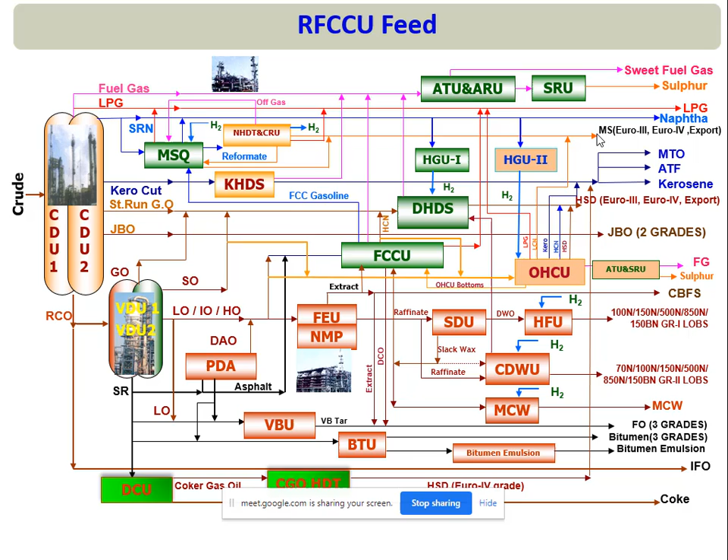So looking at this refinery configuration, the main feedstock of FCC is vacuum gas oil, coming from the vacuum distillation unit, and then the bottom product SR can also be feedstock depending on whether it is FCC or RFCC. If it is RFCC, then SR can also be a feedstock. Apart from this, hydrocracker bottom product, UCO, can also be feedstock. If there is a furfural extraction unit, then extract. Similarly, if there is a propane deasphalting unit, deasphalted oil can be fed, and slack wax can also be fed. So there are several streams which can act as feedstock of the FCC unit.

What we get from the FCC unit are products like dry gas, also called fuel gas, then LPG, and LCN, which is treated in the MSQ, motor spirit quality upgradation unit, to basically make petrol or gasoline. Then there's TCO, which is a combination of heavy cracked naphtha plus LCO. This is usually treated in hydrotreating reactors like DHDS or DHDT. And the bottom product is called DCO, which is again fed into the delayed coker unit.

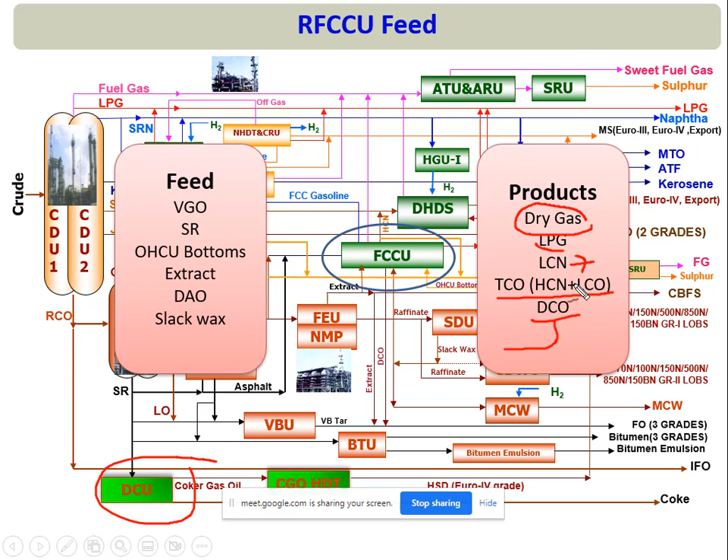So we are getting products like fuel gas, LPG, LCN. Based on that we can make petrol, and based on TCO we can make diesel. So these are the products we are getting. How we are getting it, we will discuss here.

Now about the feedstock or throughput of the FCC unit. Generally 10% of crude throughput is the throughput of the FCC unit. Suppose our crude distillation unit has a capacity of 1000 tons per hour, then FCC feed capacity will be around 100 tons per hour. It depends on the refinery configuration and may vary, but this is a rough estimate.

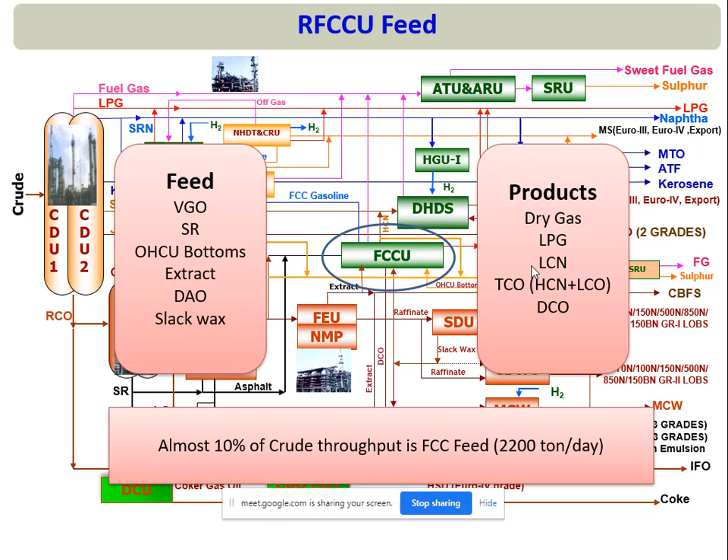Now before I explain how we achieve this, let us understand the importance of the FCC unit. It is one of the most important units in a refinery, and one of the most complicated also. If you learn the FCC unit thoroughly, many people say you can gain around 40% of refinery knowledge just by knowing this unit. It is one of the most critical and complicated units in a refinery, and many say that if you are a chemical engineer with working experience of FCC unit, then you have learned almost every type of equipment and process.

But right now I am explaining why it is very important in refinery. It is called the gasoline machine, since 40 to 60% of a refinery's gasoline production comes from the FCC unit. So petrol, one of our most important products, is mostly made in the FCC unit. And FCC is important because it converts very low value feedstock, like vacuum gas oil or short residue, into very high value products like LPG, petrol, or diesel.

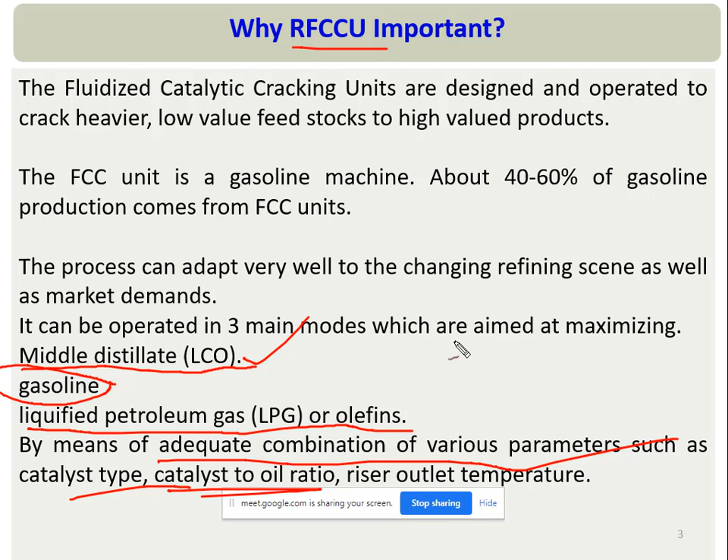So we have several parameters. By changing these parameters like riser outlet temperature, catalyst to oil ratio, catalyst type, we can convert our one product to other depending on our economics.

Let us start our discussion and see what is the full form of this unit. The full form is Fluidized Catalytic Cracking unit. The reaction is catalytic reaction, and what it is doing is cracking very large molecules into lighter molecules, and it is cracking in a fluidized bed reactor. The name itself suggests many things. It's a fluidized catalytic cracking unit, meaning cracking is taking place in the presence of catalyst and in the fluidized bed reactor. So this is a catalytic cracking reaction, so there must be some catalyst.

And what is this catalyst? If you are learning about secondary processes like FCC, hydrocracker, delayed coker unit, and DHDS, DHDT type units, these can be better understood by first understanding what the catalyst is and what type of reaction is taking place. Because if you know the chemistry, you can even predict how the equipment will be. So let us first learn about the catalyst and reaction, what the catalyst is and how it acts, as well as what type of reaction is taking place, and then we'll go into the processes.

FCC catalyst is basically made of four major components. The primary major component is called zeolite, which is the main active ingredient of the catalyst. Apart from zeolite, there is matrix, which also has some important purposes I will discuss. Then there is clay, and all these three will be bound by another component called binder. So with binder, we are basically binding zeolite, active matrix, and clay. These are very porous catalysts with very fine particles, like sand type particles, having very high surface area, with particle size varying from 10 to 150 microns. It's a very small type of particle, looking like white sand.

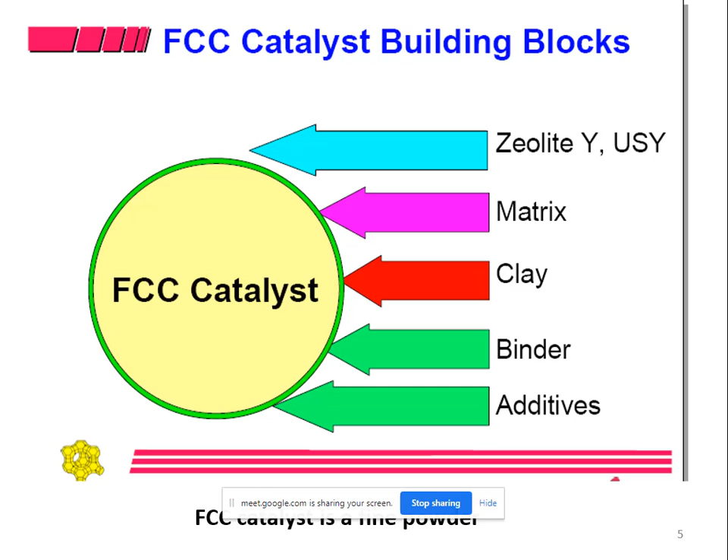What is zeolite? You may have heard about molecular sieve. It's a very important catalyst, and this is a very vast subject. Several books have been written only on this catalyst, so I cannot delve into much detail, but a very basic understanding will be provided in this lecture. What is zeolite? Zeolite is basically crystalline aluminosilicate. Now look at this structure. This is basically a tetrahedra, and at the center of this tetrahedra there is a silicon, and there is another aluminum.

So one aluminum is connected with four oxygens, and generally we know that aluminum remains in +3 oxidation state. So there will be a net negative charge on aluminum, while silicon will be neutralized because it's having +4 oxidation state and connected to four oxygens. So there won't be any positive or negative charge net. However, on aluminum there will be net negative charge, and to neutralize this there is an H plus ion.

If this type of zeolite is neutralized with H plus, this is called HY zeolite catalyst. There could be several other types of zeolite: if it is neutralized with sodium then it is called NaY, and there could be several other ways. If it is neutralized with some rare earth then it is called REY. Now, because of this H plus ion, this zeolite acts as a Bronsted acid.

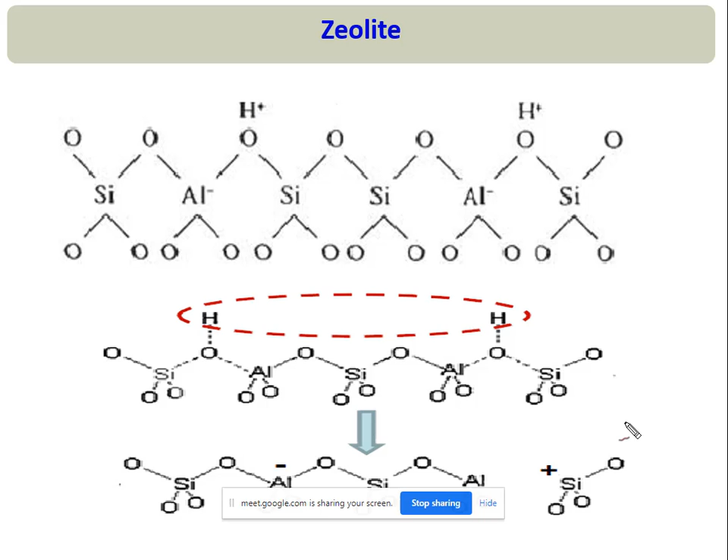Now let me explain how catalytic activity arises with zeolite. This negative charge is neutralized with this H plus ion, and this H plus ion acts as an acid, so this will act as a Bronsted acid. Another thing is, at very high temperature, these two H plus and one oxygen will separate, and because of this separation there will be a plus charge on this silica, and then it will act as a Lewis acid. So this zeolite can act as a Bronsted acid as well as a Lewis acid at very high temperature.

So this is again represented here as zeolite at very high temperature, where H2O can be liberated, and this will become an active Lewis acid site because it will accept electrons. So why am I explaining that this zeolite can act as a Bronsted acid or Lewis acid site? Because this is the reason why this reaction is taking place with this zeolite.

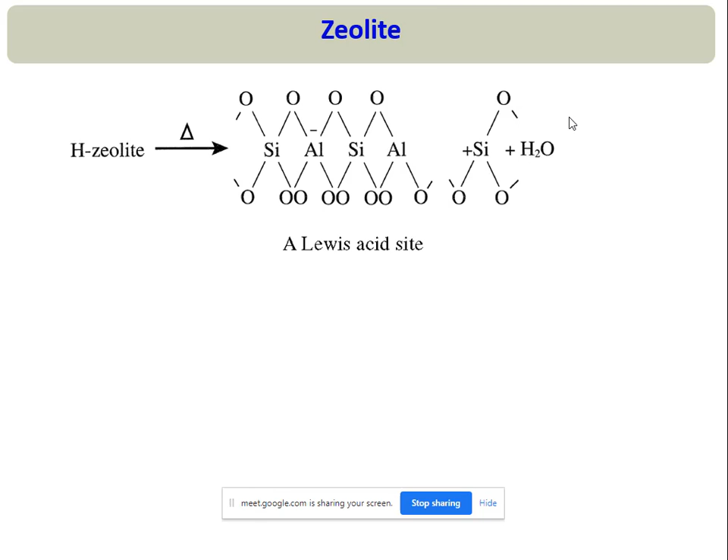Let me explain. This can act as a Bronsted acid site, meaning it can donate protons. And this can act as a Lewis acid site, meaning it can accept electrons. This is very simple chemistry we have learned in school also.

So suppose one olefin is there, and if it is acting as a Bronsted acid site, it will provide an H plus ion, and then this carbocation will form. Similarly, if there is an alkane, and it is acting as a Lewis acid site, then an H minus ion will be accepted by this Lewis acid site, so again a carbocation will form.

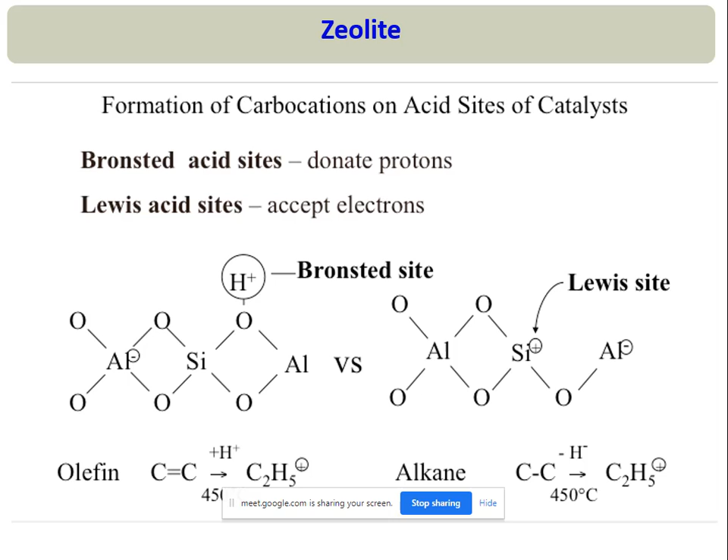So due to this zeolite catalyst, due to this acidity of the zeolite, olefins or alkanes may convert into carbocations, and once a carbocation forms, several different reactions can take place, because we know that tertiary carbocation is very stable. So this carbocation will rearrange and try to form a tertiary carbocation, so isomerization reaction will take place. So in FCC, isomerization reaction takes place.

One reaction we have understood based on these catalytic properties. Another reaction: this bond is called the alpha bond, this second bond is called the beta bond. Now wherever there is a positive charge, the beta bond is usually a very weak bond, so this beta bond can be broken because of this. We have learned this in school in basic chemistry.

So this bond can break, and if it breaks at this side, then this will form an R plus ion, and one olefin will form. And if this beta bond breaks, then what happens? R-CH2 forms, and then an olefin forms. So you see what is happening here: a large long chain molecule is breaking, or basically cracking, into smaller molecules, and olefins are forming.

So you see here, because of this zeolite, two different types of reactions we have explained right now. One is the cracking reaction, where large molecules crack into smaller molecules, and at the same time olefins are forming mainly. As well, due to this carbocation rearrangement, isomerization reaction is also taking place.

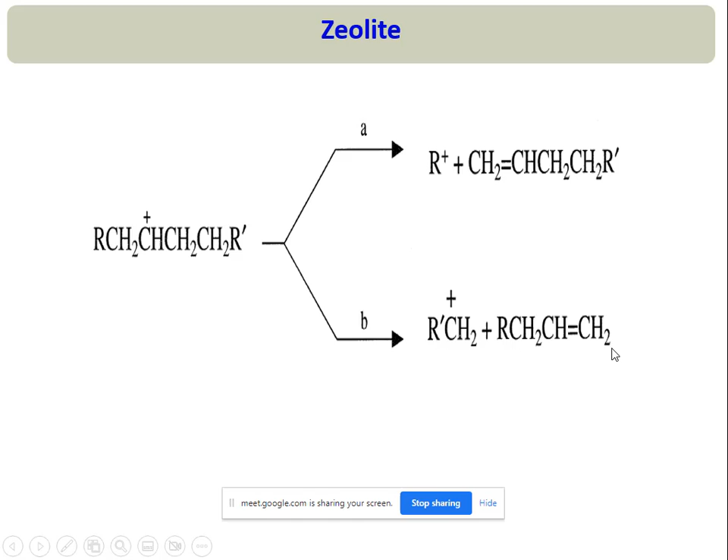I hope up to this point everything is clear, and now let us understand some other type of reaction which might take place in FCC. Because it's a complex series of reactions taking place in FCC, and almost every reaction, the cracking reaction, is basically endothermic, so it is the main reaction. FCC reaction is mainly endothermic.

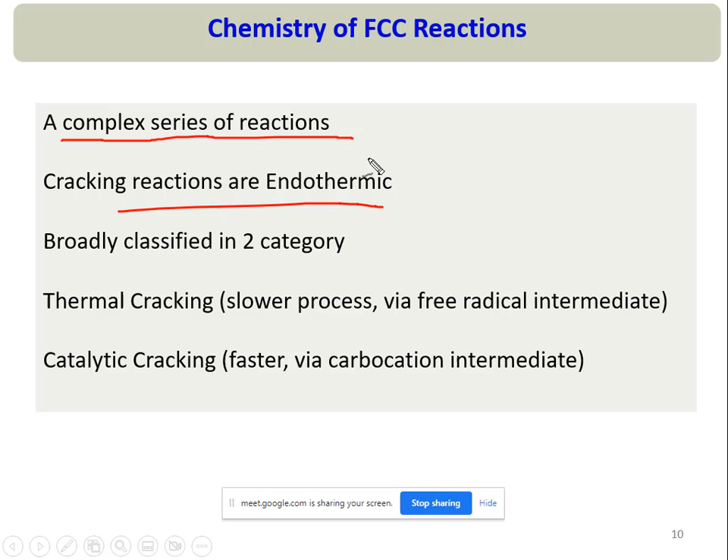So apart from cracking and isomerization, there is another type of reaction that is very important, called hydrogen transfer reaction. And how is hydrogen transfer reaction taking place? Here two olefin molecules, or one olefin and one naphthene...

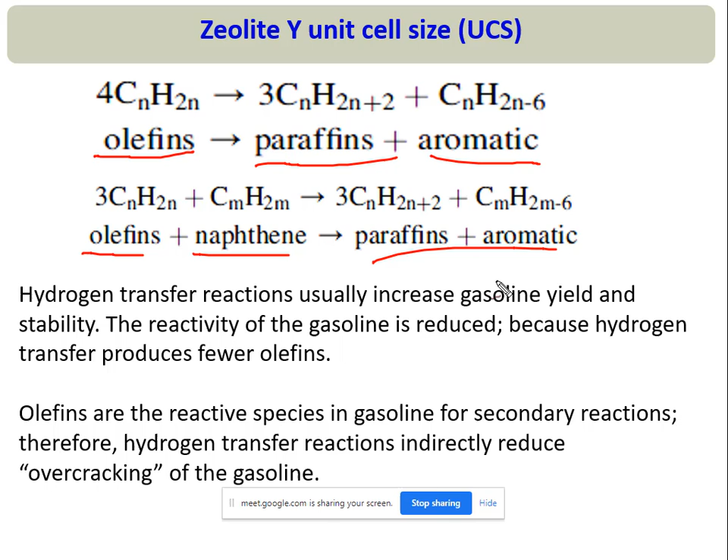So in this reaction, one reactant will be olefin, and another reactant could also be olefin, or it could be naphthenes. These two react and hydrogen transfer takes place, and because of this, one olefin is converted into paraffin and another is converted into aromatic. Similarly, here one is paraffin and another is aromatics. So this is another type of reaction taking place, hydrogen transfer reaction.

Apart from this, there could be dehydrogenation reaction because of metals coming from the feed, which may also promote dehydrogenation. These are some desirable reactions, hydrogen transfer and cracking or isomerization, while dehydrogenation reaction is undesirable. We will talk about this later on.

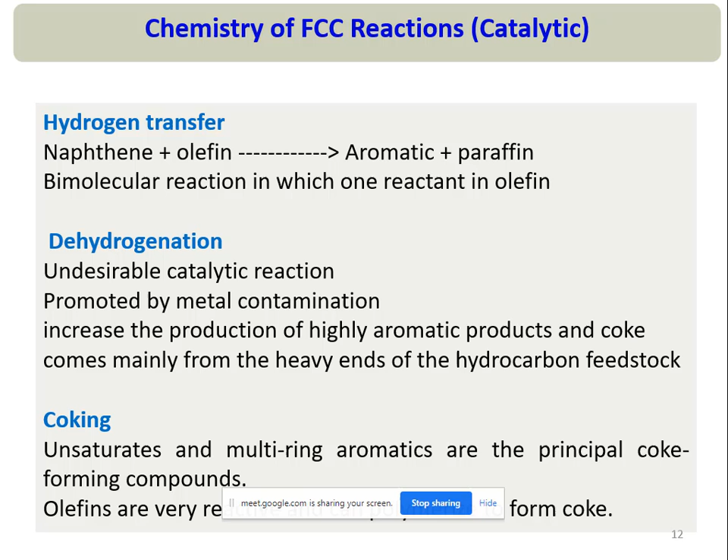Apart from this, there is another reaction called coke formation reaction. What happens is unsaturated olefins or multi-ring aromatics basically polymerize at these conditions and form coke. It's a polymerization and condensation reaction, and it's a complicated mechanism, so we won't delve into that. So basically the reactants for coking are unsaturated olefins or multi-ring aromatics, which may lead to coke formation. So these are the reactions taking place, and I have explained how it happens.

Apart from zeolite, there could be matrix. What is the purpose of this matrix? Basically zeolite has very small pores, and because of that there is selectivity in zeolite, so everything cannot enter the zeolite pore. So how will you convert very large molecules, meaning crack very large molecules, since they cannot enter zeolite? There is another active ingredient in the catalyst called matrix, which basically cracks larger molecules into smaller ones, and then they go into zeolite, where they are selectively cracked into petrol, diesel, or LPG. So basically it enables the FCC catalyst to process heavier feedstock with large hydrocarbon molecules.

Apart from this, there would be a binder, which basically provides physical integrity and mechanical strength to the FCC catalyst. So this is all about the FCC catalyst, and during this discussion I have also discussed the types of reactions taking place in the FCC catalyst.

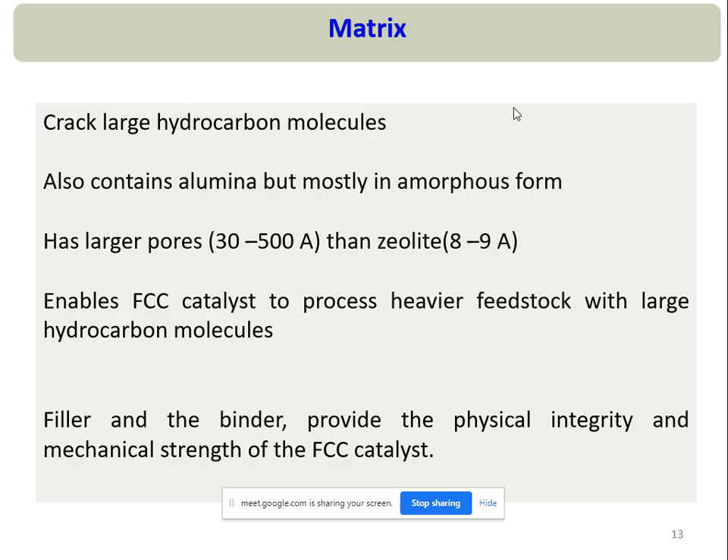Now let us learn about some deactivation mechanisms of catalyst. This is a very general understanding, basic in chemical reaction engineering, and it will also be useful in this FCC discussion. So I have just summarized the deactivation mechanism. There could be several possible ways to deactivate a catalyst, and some are temporary deactivation while others are permanent deactivation.

So one temporary deactivation is coke formation. Coke, as I already explained, also forms during this reaction, and it adsorbs on the active site of zeolite, causing the catalyst to deactivate. So catalyst deactivation results from coke material deposition on the surface of the catalyst. This is basically a temporary deactivation because it's reversible—if you burn the coke, the active site will again be free.

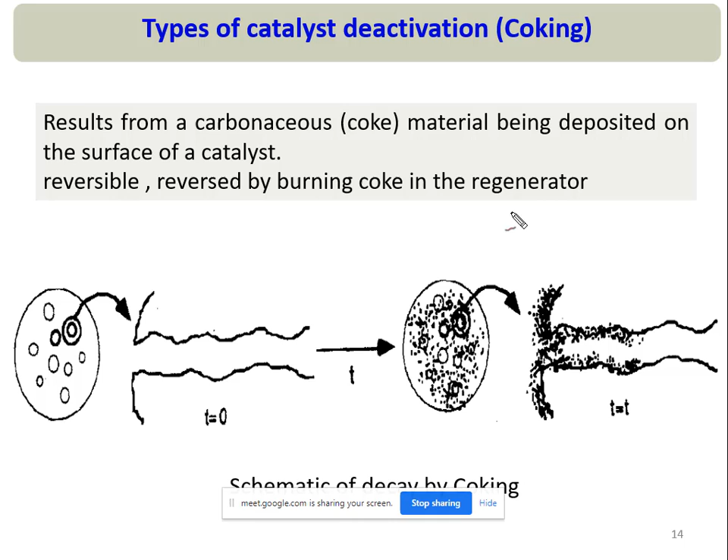Apart from coking, there is another deactivation called sintering or aging. This happens at very high temperature. At very high temperature, the porous structure gets destroyed, and because of this, the reactant cannot enter the pore, and the reaction does not take place. This happens at very high gaseous temperature, and it will permanently deactivate the catalyst.

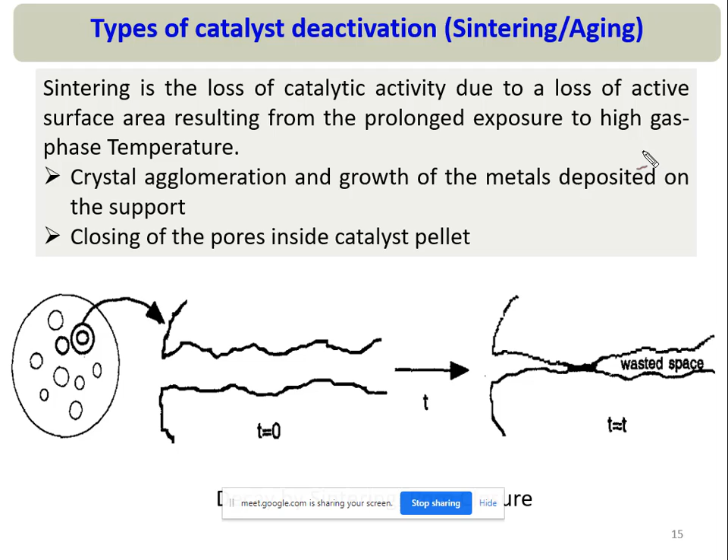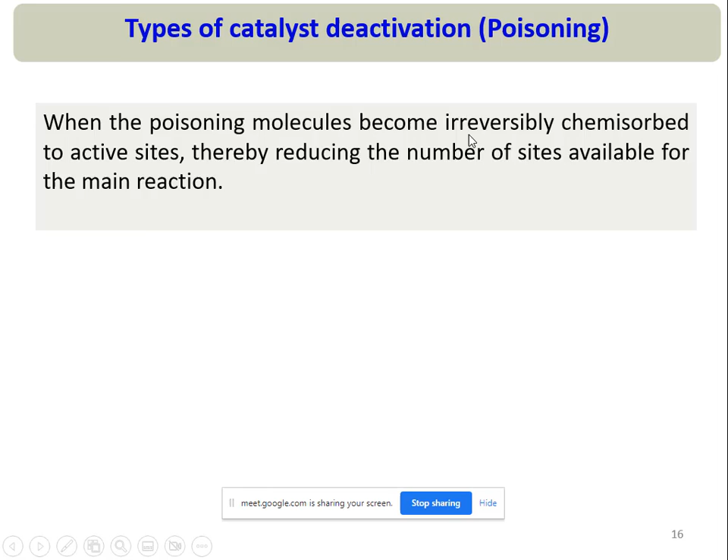Another, third type of deactivation, is called poisoning. Here, some metals adsorb on the catalyst active sites—that is chemisorption, meaning chemical adsorption takes place, and this type of adsorption is irreversible. Once it has been adsorbed on the active site of the catalyst, it won't be available for our main reaction, and in that way the catalyst will deactivate permanently. So all three types of deactivation may take place in FCC, and we will discuss this while discussing the reactions.

Okay, so we have discussed the catalyst, we have discussed the reaction, and we have discussed the catalyst deactivation process. Now we will discuss the process.

Before I go into the process flow diagram, let us first understand what fluidization is, because this reactor is basically a fluidized bed reactor, and if you have gone through fluidization, it will be very easy for you to understand. But anyway, I am explaining briefly what fluidization is here, and then we will delve into the process. See, suppose we have a fixed bed of catalyst here.

Fixed bed of catalyst means catalyst particles are there. Suppose if there is a catalyst particle on this column, and I am providing gas from the bottom. Gas will move through this catalyst particle, and this interparticle space is where gas will flow through these paths. This type of reaction taking place in this type of reactor is called a fixed bed reactor.

Basically, gas is moving through the catalyst, through the intermolecular gap. During this reaction in a fixed bed reactor, the fluid particle moves like this. Now suppose I'm increasing the gas velocity.

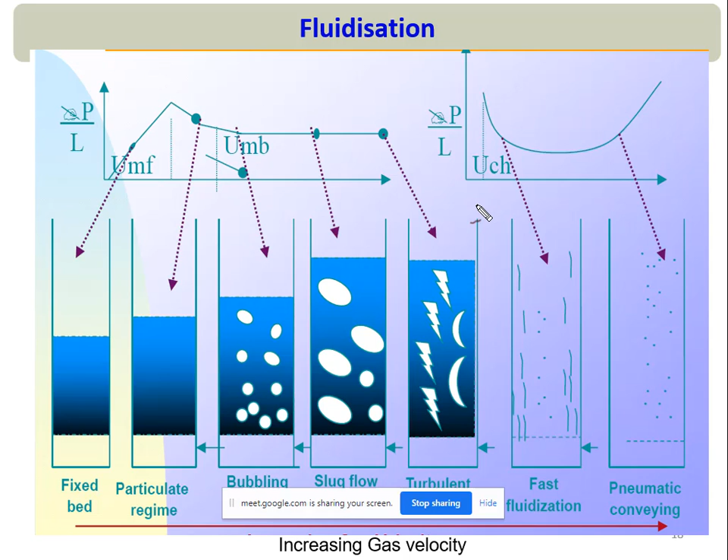These fluidization regimes you will observe in the FCC different sections, I will discuss about it. So here you should understand that because of this gas velocity, I am converting these solid particles into a fluid, and there we will apply every fluid mechanics formula.

As I explained in the last part, any feed which goes into any unit first comes to the surge drum. And I explained that there are several reasons for the surge drum. One is that if our upstream pump disturbs, then also our unit will not get disturbed because of the surge drum, because it provides residence time.

So I will discuss about this. Right now, suppose whatever feed is coming will first come into the surge drum, and from the surge drum there is a feed pump, and it will go through a series of heat exchanger networks. Okay, just one minute.

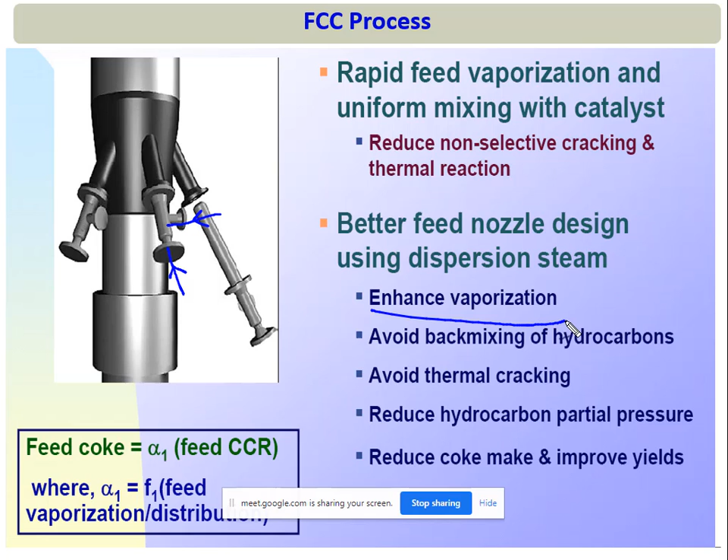Why am I explaining this, why is vaporization required? Because the reaction which will take place in this riser should be done in vapor phase. Why? Because the catalyst particle is a very small particle, it's like sand, and suppose there is sand, and if you provide liquid, then mud will form. There should not be liquid in this whole process.

The feed which is coming in the liquid phase should convert into gas as soon as possible, and for that there is a nozzle that basically breaks the feed into small particles. There, hot regenerated catalyst is coming, and hot regenerated catalyst will be in contact with the feed, and it will vaporize the feed immediately. Then this gas - I mean feed gas and catalyst, hot catalyst - will move into the upward section.

When it moves in the upper section, because this is a pneumatic conveying zone of fluidization, during this movement reaction will take place, and this type of reaction is basically endothermic, as I have explained. So during this movement reaction will take place, and during this reaction our product will form, as well as coke will also form, and coke will deposit on the surfaces of the catalyst. So the catalyst will deactivate, and at the same time product vapor will form.

So once this reaction takes place, our main purpose will be to separate this catalyst, so that I can burn this coke and the catalyst will again be regenerated, become active again. So I have to separate this catalyst from the product vapor, because product vapor is our main aim - that's what we are doing all these processes for.

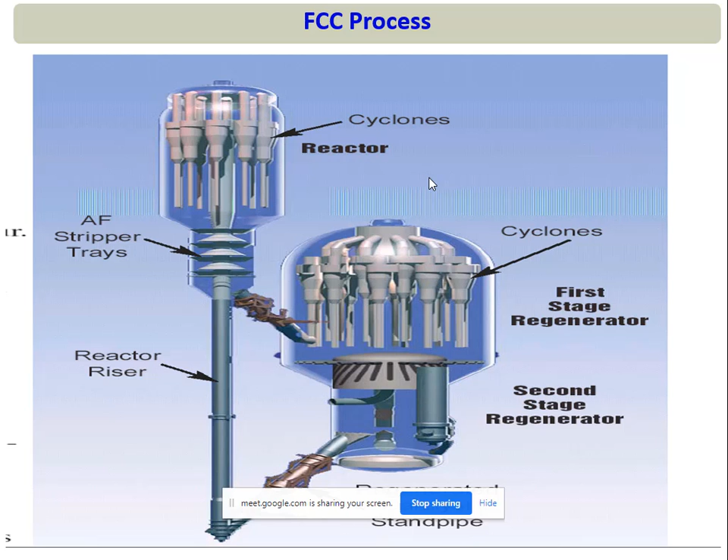Basically what happens in a cyclone separator is the gas will enter tangentially, and due to this entrance, the gas will follow a circular path. During this circular path, catalyst particle, which is heavy and has high density, will move towards the outer periphery, while the gas remains in the center. The gas ultimately moves out from the cyclone from the top, and the catalyst particle, which goes into the outer periphery, ultimately moves in the downward direction and goes to the bottom, while gas moves out at the top. It works like this.

So whatever product vapor is going, it will move into the set of cyclones. There might be a primary cyclone, and the exit of it will go into a secondary cyclone, and so on. The catalyst will move downward. So catalyst coming from the riser termination device as well as from the cyclone will move into the downward section, and the catalyst from the riser termination device will also have some product vapor, which we need to separate.

Why do we need to separate it? Because that product is our main purpose. We would not like to send the product vapor into the regenerator, because in the regenerator our product will be burned, and that is not a desirable thing to do, because we are doing all of this just for our product vapor.

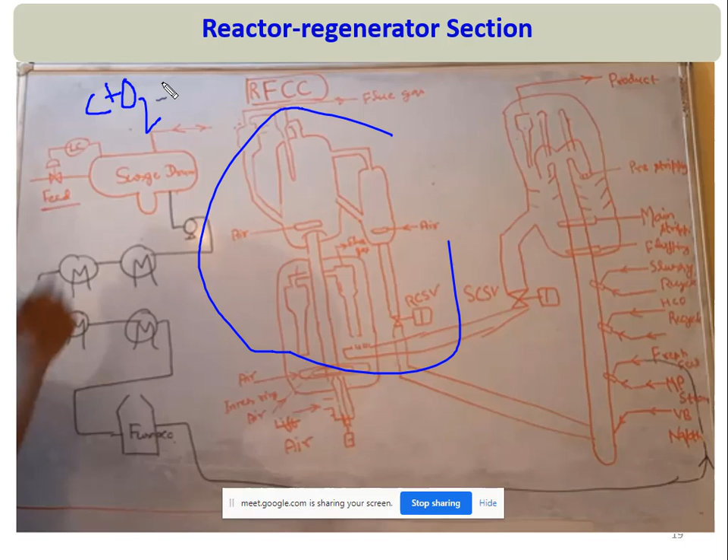Whatever type of FCC unit, if there is a full combustion reaction, then coke will convert into CO2, and its energy is very high, around 7,800 kilocalorie per kg. So because of full combustion, coke will be burned fully. At the same time, temperature of regenerator will go very high, and because of this, catalyst circulation will go down, because at very low circulation rate you will maintain this reactor outlet temperature if full combustion mode is taking place.

While in partial combustion, coke may convert into CO, and the heat generation will be less, and in that case catalyst circulation rate may increase. So depending on the condition, if CO is there, then this CO may need to convert into CO2 in a CO incinerator. So this flue gas will in that case go into the CO incinerator. It's a kind of thing.

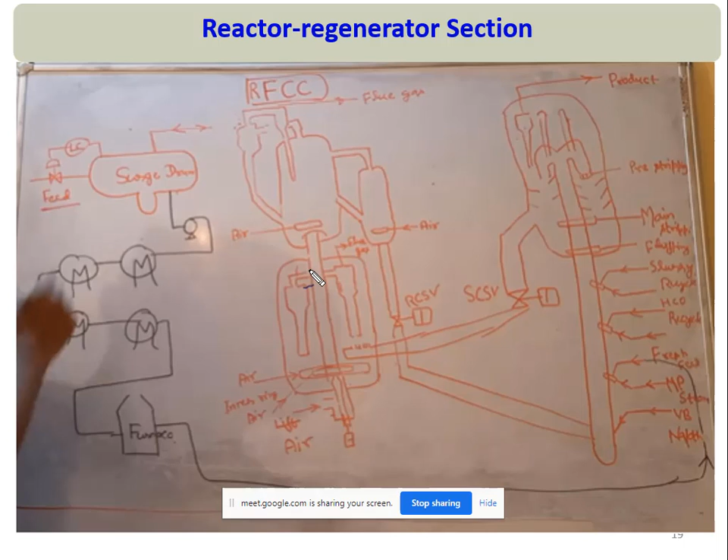I will not go into detail about this due to time limitation, but anyway, there could be different types of regenerator sections, and in every regenerator section, in the presence of air, coke on the spent catalyst will burn out, and then our active site is again available for reaction, and that regenerated catalyst will flow through this RCSV again into the riser.

So I will discuss some of the important operating parameters in FCC. Generally, we maintain furnace outlet temperature, coil outlet temperature around 220 degrees Celsius. So here, this feed is coming from the feed surge drum with pump with feed preheat furnace, and it is going into the riser, with preheat temperature around 220 degrees Celsius. Reactor outlet temperature, meaning temperature at the riser termination device, is around 514 degrees Celsius. Reactor pressure is around 1.4 kg per centimeter square G.

Then this catalyst, after this reaction, we have here, this is a stripping zone. After this reaction, it goes to the regenerator through a spent catalyst slide valve, and the residence time, as I have explained, is around 2 seconds.

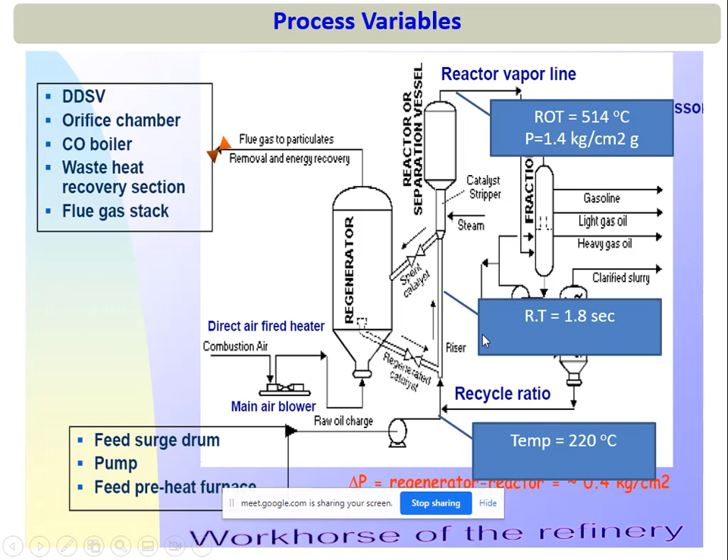In regenerator, if it is two-stage regenerators, the temperatures are like this: 700 degrees Celsius in regenerator 1, and 750 degrees Celsius in regenerator 2. So you see that catalyst temperature is going very high due to exothermic reaction in regenerator.

While in riser there is an endothermic reaction, that is cracking reaction, and because of this endothermic reaction, reactor outlet temperature will go down up to 500 degrees Celsius. So catalyst is coming from 750 degrees Celsius to riser bottom, and during this movement catalyst temperature will go down up to 514 degrees Celsius.

Now I will ask, based on this pressure, how catalyst is moving from, say, 1.4 kg per centimeter square gauge pressure of reactor to the regenerator section where pressure is 2 kg. I mean, how catalyst is moving from low pressure region to high pressure region. You need to answer this during our discussion after 5 to 10 minutes.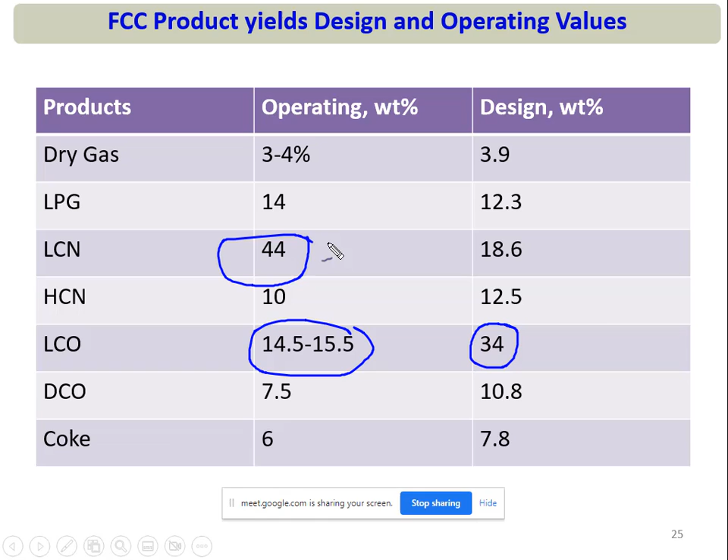So if you see, this FCC was designed for 34 weight percent product yield of LCO, while they are operating only at 15 weight percent, while LCN is 44 weight percent. So you see that the unit was designed for some other thing, and they have just changed catalyst oil ratio and catalyst, and they are operating at a very different zone.

Anyway, so till now I have discussed a general FCC, but right now I am discussing a special type of FCC called RFCCU. RFCC is a special type of FCC. Why? Because in RFCCU feed there is vacuum residue. Also one component will be VR, that is called short residue, and because of this the name is RFCCU.

Meaning there is a catalytic cracking reaction taking place in fluidized bed, and in feed there is one component of VR also. And with this we are having a lot of problems. What could be the problem?

I will explain here. So when we add VR in the FCC feed, its CCR increases, it could go up to 4 to 8%. And apart from this, with VR, some metals also come into feed, like vanadium, nickel, basic nitrogen. Apart from this, there will be sulfur, aromatic or asphaltene type of material.

So because of these, several problems are created. Why? As I explained about catalyst deactivation, one catalyst deactivation is metal poisoning. So if we are processing VR in RFCC, vanadium as well as nickel also comes with the feed, and this nickel and vanadium basically promote dehydrogenation reaction. Because of this dehydrogenation reaction, more hydrogen forms, or basically it will form more dry gas, fuel gas formation will be high, and because of this it usually limits our wet gas compressor capacity.

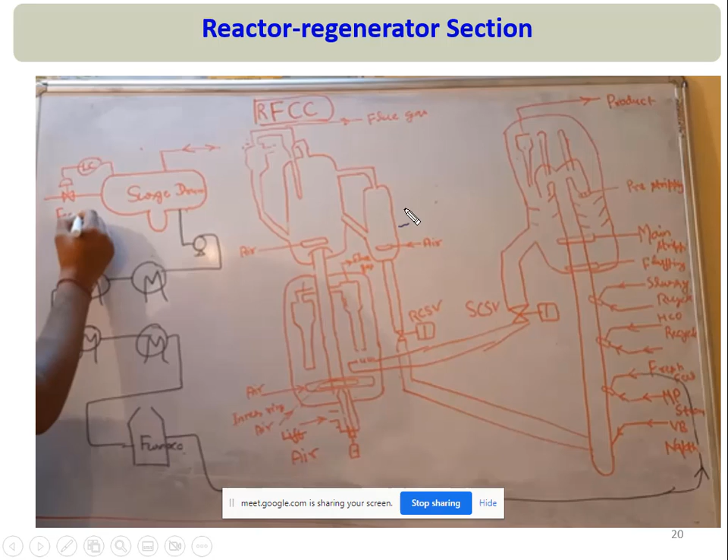Why is it written RFCC? Because this vanadium at very high temperature reacts with oxygen to form V2O5, and this vanadium pentaoxide reacts with H2O to form vanadic acid, and vanadic acid can destroy the catalyst structure.

So to avoid this, we do two stage regeneration. In the first stage regeneration, we do not allow very high temperature, and at that time hydrogen will be converted into H2O, and the flue gas containing this H2O will move out.

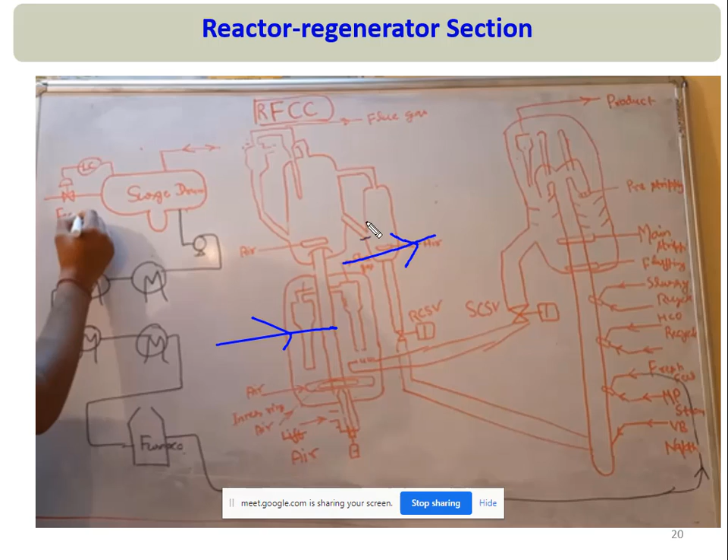Then in the second stage regeneration, there will be high temperature, but there won't be H2O to react with vanadium pentoxide to form vanadic acid. So in this way, with two stage regeneration, we avoid vanadic acid catalyst destruction.

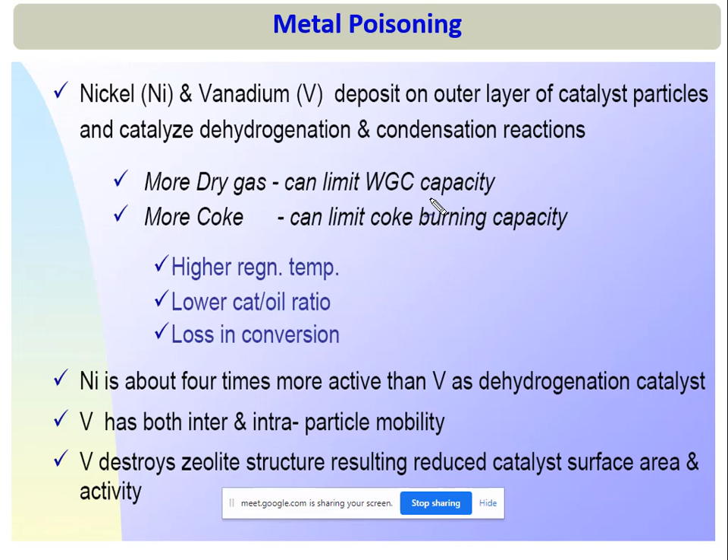So here I have explained why two stage regeneration is required, because these reactions need to be avoided, otherwise they will deactivate the catalyst. In the first stage we reduce the temperature and don't allow very high temperature, while in the second stage we limit the H2O.

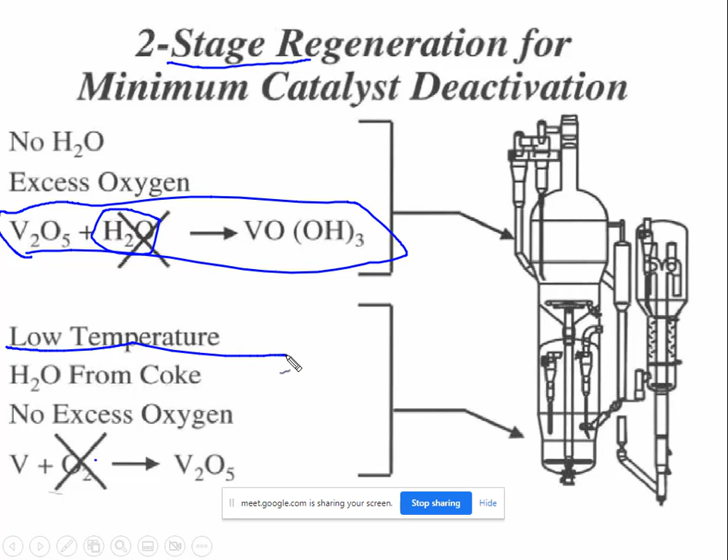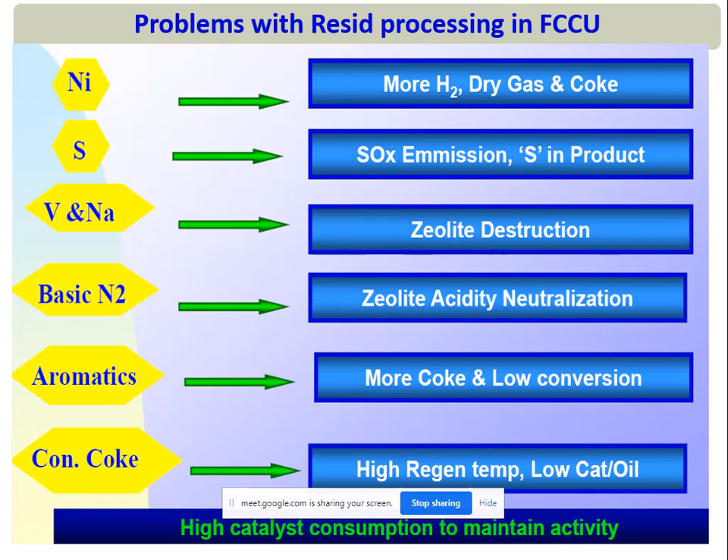I hope you understand it. Now one very important concept in FCC is heat balance.

This is very important. Heat balance in any unit is important to know whether our unit is energy efficient or not, but here in FCC heat balance has much more importance than just checking energy, because with the heat balance we understand how one variable affects another variable.

So heat balance is key to better understand how different variables interact with one another in the FCC unit. Why? Because the FCC unit adjusts catalyst circulation in such a way that reactor-regenerator heat remains balanced, so the heat generated in the regenerator will be consumed as heat of reaction in the reactor.

So there are several types of heat. During reaction there is heat of reaction, so this is a heat sink, and some heat losses will be there too. So what we do is a heat balance, and based on heat balance we have some independent process variables and some dependent process variables.

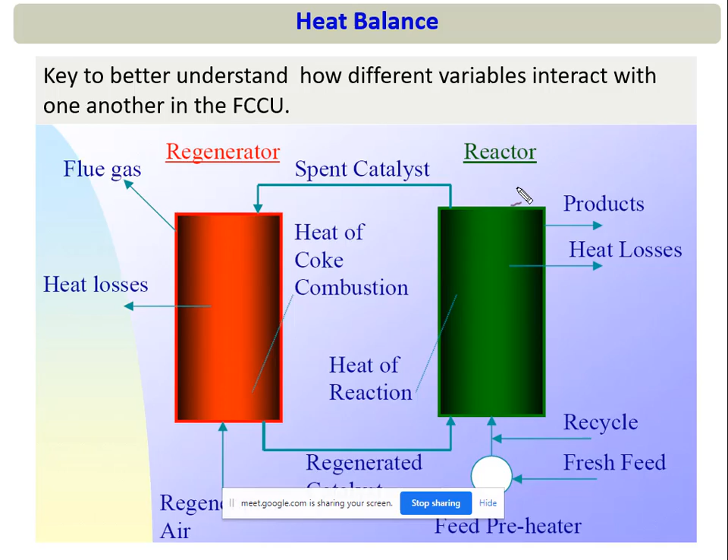In FCC, we cannot regulate all the temperatures by ourselves. If reactor temperature, feed preheat temperature, catalyst activity, and recycle rate are in our hand and we control these as independent variables, then other variables will be dependent, changing based on heat balance.

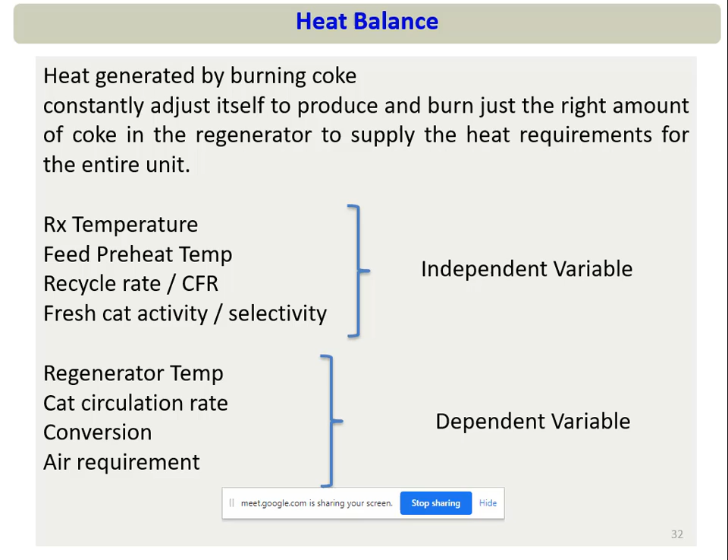It will change in such a way that the unit remains in heat balance, meaning whatever heat is generated will be consumed. Because of this, heat balance in FCC is very important and a better understanding of it is required. So I've just introduced it; I will not go into detail of heat balance.

I will share this slide. If you go through this, you might understand. Based on this, I have explained how reactor temperature, if you increase it, affects these other process variables.

So I hope you guys have got some understanding of FCC. FCC is a very vast topic, I cannot explain it in one hour. I have been working in FCC for 7 to 8 years, and I have tried to summarize the basics of FCC in this lecture. I hope you have enjoyed it.